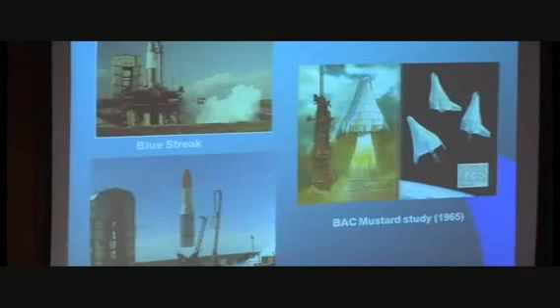Blue Streak, we developed a respectable weapons system. There are people who are advocates that we were sort of robbed when we lost Blue Streak. I'm not one of those advocates.

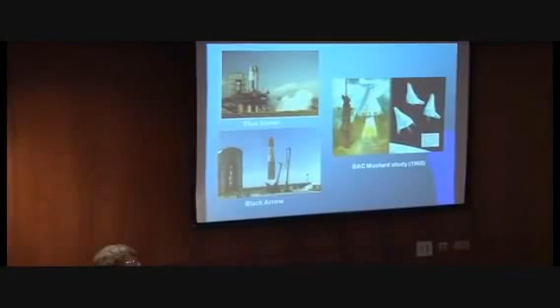If you go to East Fortune, just down the road here, go on a day when they'll let you into the little hangar at the back where they've got, I think it's the F-16 round of Blue Streak, and alongside Blue Streak is a Polaris A3 missile, and you will see there is no comparison as a weapons system.

And so what we did, we offered this to the Europeans, we built a multi-stage rocket out of it, and then of course we pulled out the first stage, which left the Europeans sort of a little bit lost for what to do next.

Just a few hundred miles down the road at British Aircraft Corporation, in the 1960s, people there were already looking at trying to get reusability into launches. A very successful study this was, but sadly, again, it never saw the light of day.

In the mid-1980s, we started on the HOTOL project, which came from the fact that in the early 1980s I'd managed to adapt some thermodynamic principles from nuclear engines I'd been working on, and found they could be applied to air-breathing engines. I'll talk about that in more detail later. The main thing is this study got underway, and it had its problems, which I'll mention.

But the biggest problem of all was this guy, and if the Conservatives win the election, I'm afraid he, like Dracula, may be back to haunt us.

Launchers then today, things have moved on a bit from those days of Black Arrow and Blue Streak. In Europe, after we pulled out our first stage, the Europeans went on and developed rather outstanding technology ultimately. Ariane 4, which came before it, was a bit basic, but Ariane 5 is a very sophisticated modern launch vehicle.

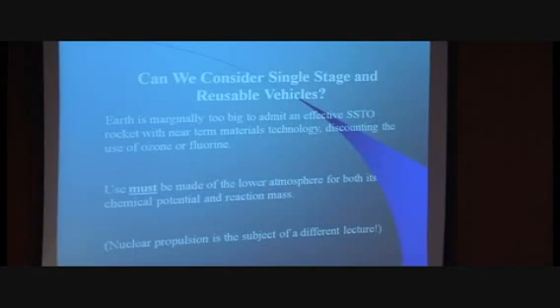However, consider if we'd lived on a planet twice the size. If there are people out in the universe living on planets twice the size of the Earth, maybe they're not here because they can't get off the damn place that they were born in.

So, with near-term materials and technology, and discounting the use of ozone and fluorine, it becomes obvious that we've got to make use of the atmosphere. Without going nuclear - and that's the subject of a different lecture - we must use the atmosphere both as a reaction mass and also for its chemical energy.

I'm told I can get a little more technical with this audience than I'm usually used to, so I assume everyone here is familiar with the rocket equation normally attributed to Tsiolkovsky, but which was actually being set as standard exams at Cambridge for university graduates during the mid-19th century. The object here is, if we want to get into orbit, we've got to build a system that can put about 9.5 kilometers per second delta V into the vehicle.

And so here we are. If we're going to do that, then the vehicle has to have, give or take, a mass ratio of about 8. That is, at liftoff, it weighs 8 times as much as it weighs when it's burnt all of its propellant getting to orbit. And that's quite a tall order.

Now, one option is to go air breathing all the way. You build a scramjet or something like that, and you put a lot of effort into the air breathing side of it. But we can consider this a little bit more logically.

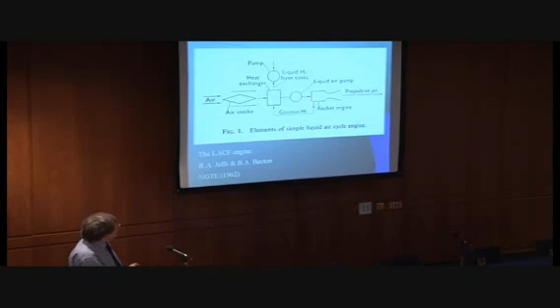At the National Gas Turbine Establishment, now long subsumed into other establishments I'm afraid, Jeffs and Barton in 1962 came up with the concept of the liquid air cycle engine, in which air passes into an intake and a heat exchanger. The liquid hydrogen fuel is simply pumped through this in sufficient quantities to liquefy the air, and then in this rather simple little diagram, pumping the liquid air into a rocket combustion chamber for the early part of the air-breathing ascent.

And the advantage of that, of course, is that when you finish with the air-breathing bit at some unspecified Mach number, you can then go on to replace the liquid air with liquid oxygen that you're carrying on the vehicle. So this concept goes back a very long way.

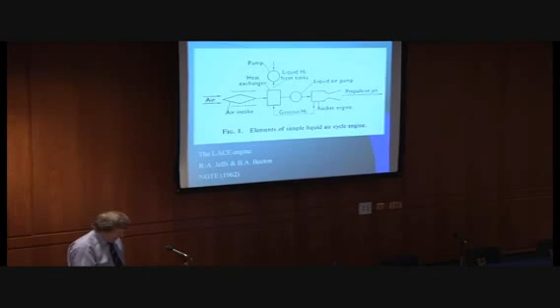There are huge problems in simply what's put there, but here you can see that the liquefaction is a simple-minded process of simply putting cold liquid in, cold air comes out, and hot gaseous hydrogen is the product.

Well, it turns out that if you sort of get to grips with the thermodynamics and invoke entropy as well as conservation of energy, then there are some interesting tricks that you can play. And for those of you who are familiar with entropy, you'll know that there's a perfect gas relationship for the change of entropy of a fluid, which relates not only the temperature ratio, but the pressure ratio that the fluid goes through.

And therefore, if you set the delta entropy to 0, you can trade a temperature ratio for a pressure ratio. And so if instead of using the hydrogen simply as a coolant, you use it as the heat rejection system for a thermodynamic cycle, lots of things are possible. And so having given you that tempter, I shall come back to that in a little while.

As Jason referred to, the immediate product of the work that I did on this in the 1980s was the HOTOL vehicle. And you can see that we had what was essentially a rocket, and we put some wings on it. And you can see that being rocket engineers, we put all the engines on the back of the vehicle, and we had the liquid

hydrogen tank in this long forebody. That was a fundamental mistake.

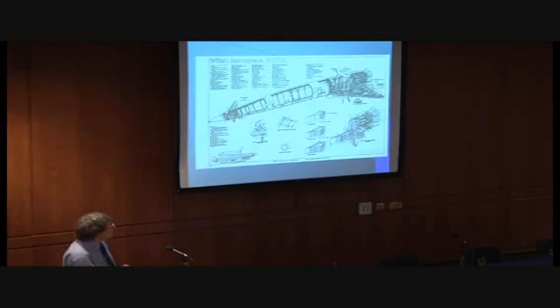Nonetheless, it was an inspired study, and this still remains the only study in the open literature where you can actually go and find everything that was done. British Aerospace and Rolls-Royce really gave this a very thorough going over. And at the end of it, the conclusion was that we'd got some serious problems, but nonetheless the concept was fundamentally sound. The serious problem was that by putting the engines on the rear of the fuselage, we had determined absolutely where the centre of gravity was going to be.

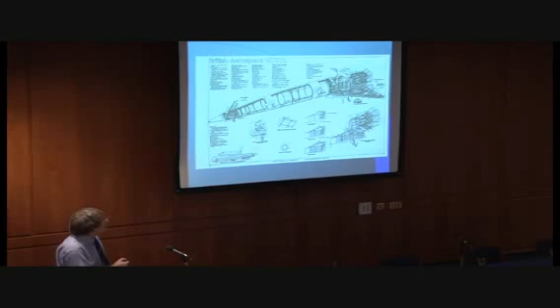The problem with this configuration is that as you accelerate up the Mach number range, the lift on the forebody remains more or less constant, but the lift on the wings falls off as 1 over the root of M squared minus 1. So you have a tremendous forward move of the effective centre of pressure of the configuration. At Mach 5 we were trying to battle with a 2,000 ton-metre moment trying to pitch the nose of the vehicle up. That result required huge flaperons, and an equally huge power supply to drive them. This vehicle became a transport system for hydraulics into low Earth orbit.

So, after a lot of thinking, Reaction Engines sort of came into being at the end of the 1980s, and we tried to understand what had gone wrong. The answer was: don't put the engines on the back of the fuselage. And because it turned into a rather long pointy sort of shape, I'm sorry to say that I remember the Skylon sculpture at the Festival of Britain in 1951, so we named it Skylon after this very inspirational British exhibition.

Unfortunately, Jason told me tonight that he gained his inspiration from a project I worked on when he was 11, so we won't dwell on that further in this talk.

What do we want out of a space plane if it's going to have commercial characteristics? We want it to be reusable, single stage - we don't want to be sort of getting an Airfix kit at the launch site every time we do a mission and have to put it all together.

We'd like it to be unpiloted. A lot of people don't really like that, but a pilot hurts you in several ways. First of all, you have to keep him alive, so we've got to put a life support system on, which is a waste of payload. It means that in the development program you are constrained again by having to keep the pilot alive, so most of the systems you put onto the program have got to be developed like a civil airliner, or at least a military aircraft, rather than a missile program.

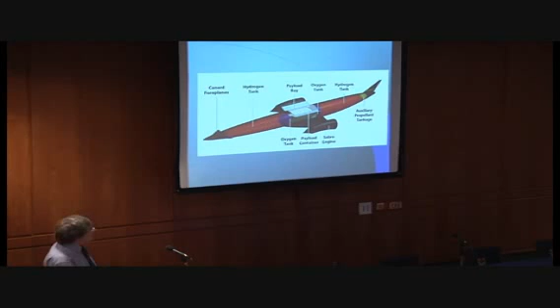You've got liquid hydrogen and liquid oxygen. During the air-breathing ascent, you burn the hydrogen from the rear tank, because this still suffers from the same problem that HOTOL had, but now it's much smaller - only about a 200 ton-metre moment. By burning the hydrogen out of the rear tank, the centre of gravity tracks forward as well, and therefore you can nicely cancel out. There is a residual problem, but you can trim that out with the canard foreplanes.

I don't want to dwell too long on this because I want to talk about the engines predominantly. With a liquid hydrogen vehicle, the good old faithful stressed skin structures that have stood us in good stead since the 1920s on aircraft design are no longer applicable. A lot of people have looked at hydrogen-fuelled aircraft and concluded they don't really work, and that's because they're stuck with the idea of the stressed skin structure, brilliant innovation though it was.

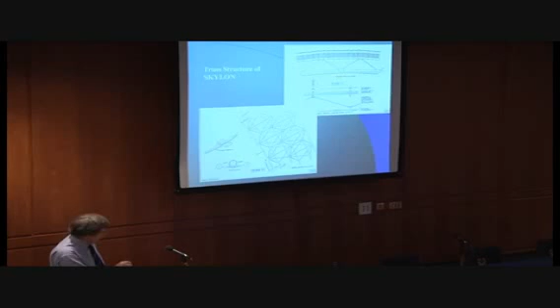But there was an earlier technology, which was airships. Liquid hydrogen really has the same problem as airships - it's a very low aerial loading of the vehicle. It turns out you need to build a Warren Girder structure for the aircraft, and put an aeroshell over the outside made out of a fibre-reinforced glass material. If we look at a temperature-specific strength chart, we've got silicon carbide reinforced titanium, and at the high temperature end, carbon-carbon and silicon carbide.

And there is this material, which is a fibre-reinforced glass. The original material was silicon carbide fibres in Pyrex - immediately a success, because the Pyrex sticks to the silicon carbide and gives a very good material. There are now other glass ceramic matrix materials, and in this region here is a very nice material we developed in this country, with good temperature characteristics and good specific strength characteristics. We're currently working with a French firm called Pyromeral, testing some of their material for monatomic chemistry compatibility in a glow discharge system we built at Reaction Engines.

And so, an airship-like structure with a glass ceramic aeroshell.

One advantage of having the hydrogen tanks on board is that Skylon re-enters about 10 kilometres higher than the space shuttle, so it doesn't reach such high temperatures. It has a larger heat soak, which is one of the problems of things with low ballistic coefficients taking a long time to re-enter. But by carrying 200 kilograms of liquid hydrogen for the return journey and vaporizing it in the tankage underneath the aeroshell, we can cope with the heat load problem.

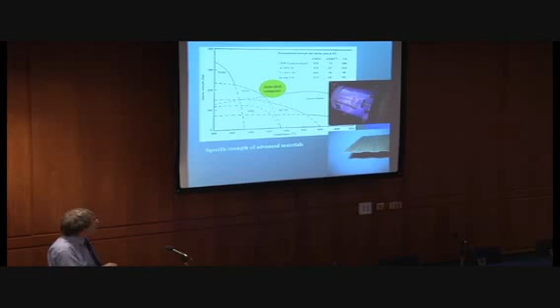Skylon is quite a mature project. QinetiQ some years ago did tests at Mach 9 and Mach 12 in the gun tunnel and in the flow visualization tunnel at Farnborough, and you can see the flow structure. The gun tunnel tests did show up some shock interaction heating and shock boundary layer interaction heating problems. We anticipated the shock ones, but we'd missed the shock boundary layer problem. But again, I don't want to dwell on that.

So Skylon configuration C1, which is the one I've mainly been talking about: 12 tons to low Earth orbit, 10 tons to the International Space Station, a 200 cubic metre payload bay, 4.6 metre diameter payload, and about 275 tons at the start of roll at takeoff. So a quite reasonable sort of machine.

It is 82 metres long, so the fuselage is about the size of a 777 fuselage, and that's because of the liquid hydrogen. Even though we've only got about 70 tons of liquid hydrogen on board, with something that's got only 7% of the density of water, it's obviously a real disadvantage.

We are currently revising this to the D1 standard with a 15-ton payload, because this design is now rather ancient.

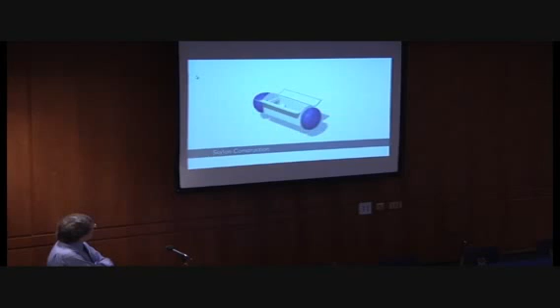This gives you some idea of the structural elements of the vehicle: the payload bay, liquid oxygen tanks, the hydrogen tanks, the glass ceramic aeroshell, the engines in the cells on the wingtips, and an undercarriage.

HOTOL could never take off on its own undercarriage, but Skylon is able to do that. In order to accept the energy of a rejected takeoff, we are proposing to use water-cooled brakes. On a successful takeoff, you throw away the 1.5 tons of water that it takes to cool the brakes if you need to reject it. Otherwise, Skylon would be a transportation system for brakes into low Earth orbit.

The idea is to try to make the loading of the payload extremely simple. I don't know what the current cost is, but 15 years or so ago, it used to cost $5 million just to put the payload into the shuttle payload bay. We're trying to look at the concepts of containerized payloads, so that your spacecraft arrives factory fresh to go with the Skylon into orbit.

In terms of fueling it, the tractor tows the vehicle out onto the start of the apron, and then liquid hydrogen, liquid oxygen, liquid helium, which is needed for pressurization and engine operation as you will see in a moment, are transferred into the vehicle. And then the tractor pulls the vehicle to the start of the runway.

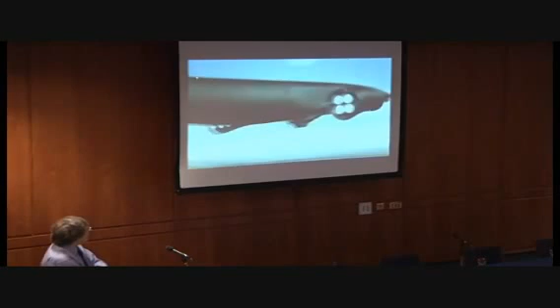Obviously you've got to close the intakes when you do the transition to rocket, because eventually you're going to re-enter the atmosphere, and you don't want the high enthalpy flow into the intakes during re-entry. These engines also have a bypass system, which I'll briefly mention later. We have to close the bypass system off as well.

On orbit, there's an orbital maneuvering system. You can see the OMS engines putting in the final velocity, and 38 reaction control thrusters for attitude control on orbit. There's also an auxiliary propellant supply in the vehicle mounted in the tail that provides a sort of gas main around the vehicle, supplying gaseous hydrogen and gaseous oxygen for fuel cells, auxiliary power supplies, and the thrusters.

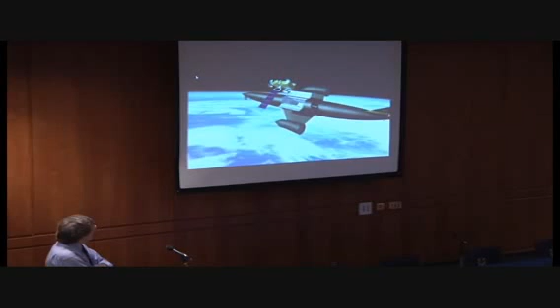The vehicle can carry a range of payloads, including a manned passenger module, depicted in this slide. As I'll mention at the end of the talk, we think this is the first part of an entire space infrastructure. If you're going to build equipment in orbit, you need an on-orbit assembly facility, which is what's depicted here.

During re-entry, the vehicle enters the atmosphere at a very high angle of attack, initially about 70 degrees, in order to lose as much velocity as possible in the first instance. But then during re-entry it undergoes a gradual pitch down to about 11 degrees, which gives us its maximum lift-to-drag ratio at round about Mach 11.

At round about Mach 9, we get authority from the tail fin. Prior to that, we have to use, same as the Space Shuttle does, the lateral yaw thrusters in order to control yaw, but we can control the pitch during re-entry on the foreplanes. We have to carry water as a coolant for the foreplanes for that part of it. And then finally, the vehicle comes in for a dead stick landing, just like the shuttle.

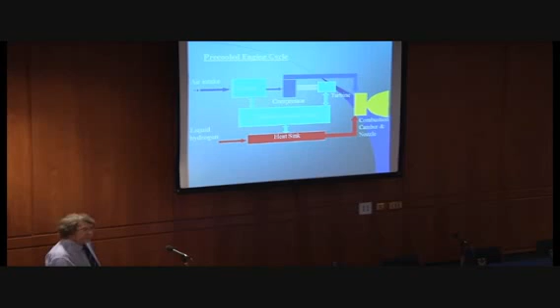I mentioned that what we actually want to do to reduce the amount of hydrogen required to cool the air is be a bit cleverer than just pumping it through the airflow to cool it. So we'd like to use the hydrogen as a heat sink for a thermodynamic cycle. Here's the hot air, the heat exchanger, which transfers heat through the cycle, which we can then drive the turbine with. So rather cunningly, some of the heat never actually leaves the air - it gets immediately put back into it through the compression process. Therefore, we don't have to remove all of the heat from the air with the hydrogen.

The only part that gets removed is by the heat sink function, which eventually finishes back in the combustion chamber anyway. So this is the first sort of chapter, or second chapter normally, of your thermodynamic textbook on heat engines - that what we're doing is actually getting some work out of the heat transfer process.

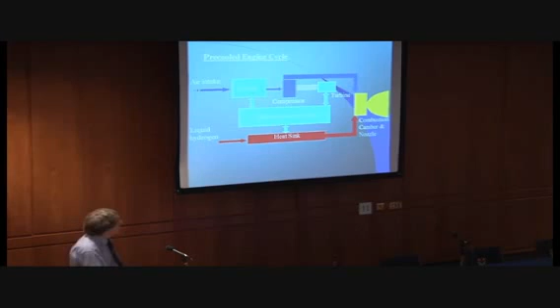It gets a bit more complicated when you try to start putting some of the equipment in, so this is sort of a semi-real schematic. Here's the pre-cooler, and what we've done is introduce a helium loop into the engine. On HOTOL, we did all this with a hydrogen loop, but everybody was very worried about what happens if a pigeon goes in and breaks the pre-cooler and all the hydrogen then goes through the engine. That's something that could be debated, but anyway, we chose to use helium. The main reason being that the Inconel materials that we'd like to use in the pre-cooler don't like hydrogen. With helium, you can use some of the better nickel alloys, and we in fact use Inconel 718.

So a helium circulator takes cold helium, cools this, and then passes it through another heat exchanger, which is heated by a pre-burner, so that helium is always at 1180 Kelvin at this point here. That then goes to drive the turbine, which is driving the compressor, before rejecting heat to the liquid hydrogen flow, and the whole of the hydrogen flow goes to the pre-burner. The airflow bifurcates - part of it goes to the pre-burner, a variable amount depending on what Mach number you're at, and the rest of it meets up with the rest of the hydrogen in the combustion chamber. Now the advantage of this is that you can vary the temperature of the pre-burner so that this temperature here in the helium loop is always constant at 1180 K.

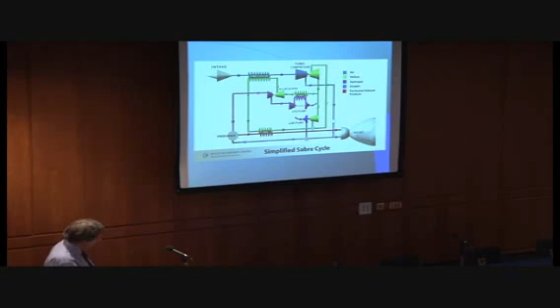So with the exception of this bit of the engine, the rest of this engine doesn't know what Mach number it's flying at. It's a drag racer engine, it's not a Formula One cruise engine. And what we need if we're going to have a successful air-breathing accelerator is an engine which is Mach number insensitive. Until we reach the temperature limits in the pre-cooler, that's exactly what this engine is.

Once you start to put it together in reality, it starts to get a bit more complicated. You can see that the pre-cooler is quite a dominant part of the engine, the turbocompressor, the rocket engines, and then all the thermodynamic gadgetry is in here.

It's an annoyance that the captured airflow in a supersonic intake does not match the airflow of the engine, and the captured flow goes roughly as 1 over the Mach number. So at low Mach numbers, very much more air is entering the intake than you need, so you bypass that air around the engine. Even with these clever thermodynamic tricks, the engine still takes far more hydrogen than you need for combustion in the main chambers, so that extra hydrogen is added to the burners in the bypass duct.

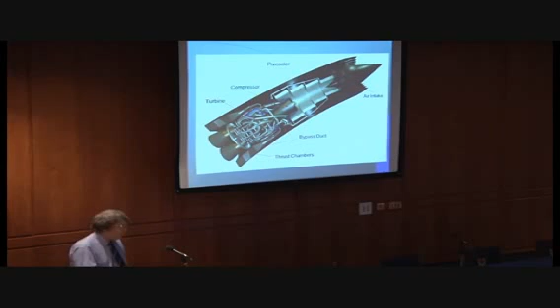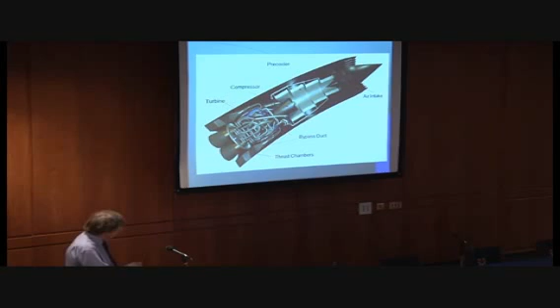And at this point, there's usually somebody who says, so what this really is, is a turbo ramjet. But it's not, because in a turbo ramjet, you use the gas turbine to accelerate you up to some Mach number, then you turn the ramjets on, and it's the ramjets that continue to the higher Mach numbers. This is exactly the opposite. At Mach 5, there is virtually no flow down this at all, and all of the thrust is developed by the main engines. The maximum thrust from the bypass duct in this case comes at round about Mach 3 to 3.5, where it gives a very useful contribution.

So some parameters then.

The nozzle area ratio is of the order of 100, a bit more than current designs. In the air breathing mode, the combustion pressure is about 115 bar. If you think about a gas turbine, that's round about 30 bar. So that's a very sporty compressor, but nonetheless, a 140 bar delivery compressor is quite doable. The rocket combustion pressure is state-of-the-art, 145 bar.

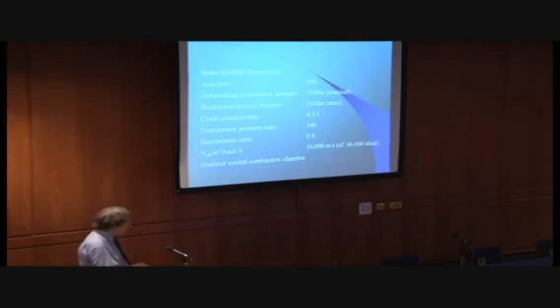What other things are of equivalence ratio? During air breathing, the equivalence ratio of the engine - the number of times the hydrogen we need above stoichiometric - is about 2.8, whereas the old LACE engine was around 4. So we've made a substantial improvement there. As a consequence, we get a theoretical effective exhaust velocity of about 16 kilometers per second, compared with a theoretical of about 46 kilometers per second. We are currently looking at new designs of Sabre engines, Sabre 4, which approaches that sort of number, but I shan't be saying anything about that tonight.

Pre-cooler construction then. We've shown that with a pre-cooler we can actually do this job and do it rather well. But how do we make it? Well, the designs we currently work on involve huge numbers of extremely small tubes. The tubes we're dealing with are less than 1 millimeter in diameter, made out of Inconel 718. And they are modular in that we have a header, a sort of Swiss roll of tube sheet to an inside header.

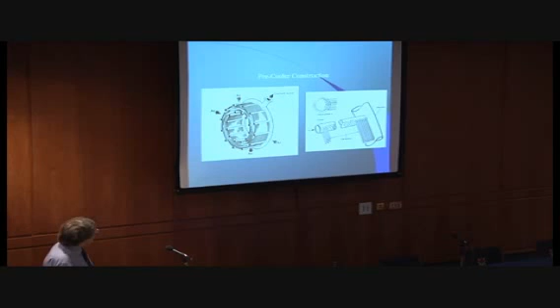The air flows radially in through the heat exchanger, and the cold helium flows in through the header, out along this spiral track to the outside, and then out here. So this heat exchanger has got the air in crossflow, but the overall effect is pure counterflow almost. And these heat exchangers have got extremely high effectiveness, 92 to 95% effectiveness.

Here's some that we did earlier. This was one of our first ones. What I want to emphasize here, you're looking at a tube here - it's 0.88 millimeter bore with a 30 micron wall. And our current tubes are of that sort of order.

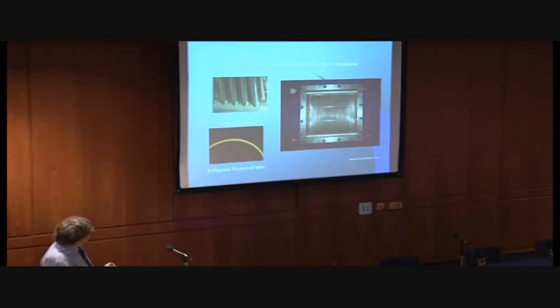This is an earlier research heat exchanger that we built, and a lot of our effort goes into, after all of this clever stuff, the nitty-gritty of how you braze these tubes into the headers. And that is quite a major task.

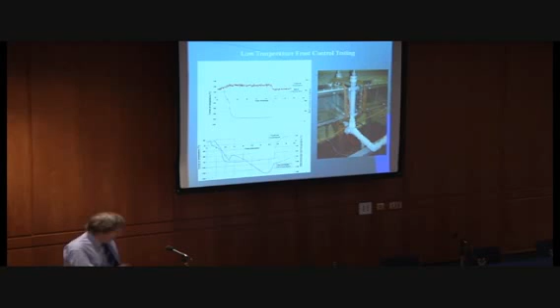When the air enters the engine, it's about 1,000 degrees centigrade. By the time it's been through the pre-cooler, it's about minus 140. And of course, there's a lot of water vapor, even in the air in this room at the moment. If you just try to do that trick, within about 3 to 5 seconds the whole thing is frozen absolutely solid.

So a lot of our activity in this research tunnel was to find a way of preventing frost formation. What you can see here is the pressure drop through the matrix over a period of about 11 minutes in that particular test. And you can see that we solved that problem. But the bad news is I'm not going to tell you how we did it.

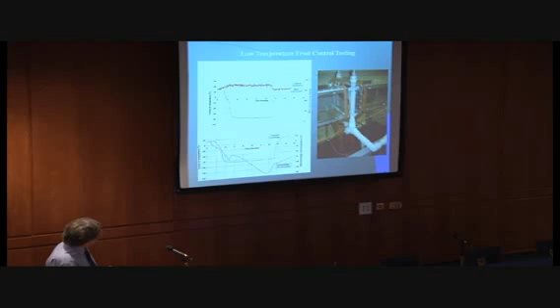So you can see here the temperature on the air side is down at sort of minus 80. During the course of the test, the coolant side temperature follows a program so that we can get as much information as possible, starting at sort of minus 50 down to about minus 150. So we did solve the frost formation problem.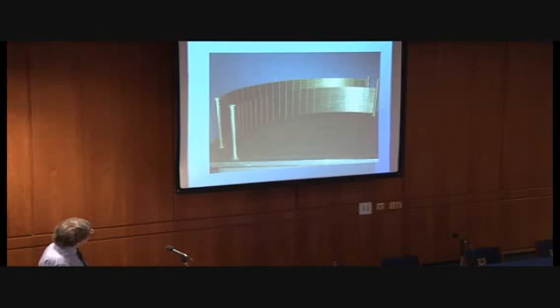But the important thing for the moment is the pre-cooler technology, and you can see that we're doing pretty good at brazed joints these days. We're very, very close now to getting 100% brazed joint success. If we don't get 100%, we simply plug the few percent of tubes that leak.

Now, heat transfer in these engines is extremely important.

And it turns out that the whole thing is dominated by the heat transfer coefficient on the air side of the pre-cooler. If we could improve that, quite major miracles are possible with this type of engine. We currently have a student from University of Bristol doing her PhD working on heat transfer enhancement on the tubes in a matrix like this.

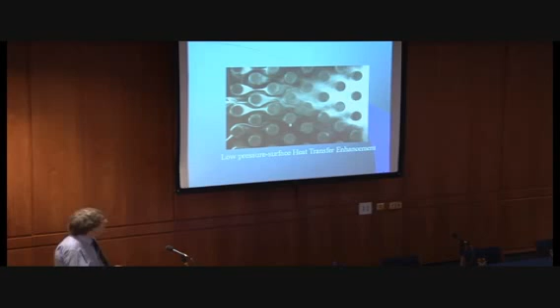This is a flow visualization. We operate these heat exchangers pretty much in the laminar regime, laminar to transitional. So what she is looking at is whether we can modify the surface of the tube without putting up the weight too much or the pressure drop. To give you an idea of the problem, the wall thickness of the tubes when we finish with them is about 15 microns. They're much thicker than that when we get them from the manufacturer.

We then process them down to about 15 microns for a real engine. We've moved on now. We've solved virtually all of the problems, and one of the things I want to say is that we are no longer into research on these engines. We are into development, but there are no issues left in this project where we need to, for example, go and talk to DARPA, which is a sort of frequent suggestion.

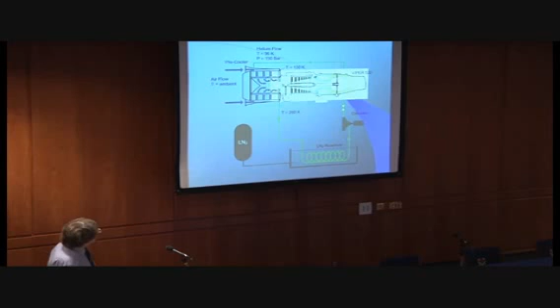We don't have any research issues left, but what we are in the process of doing is using a Viper jet engine with a pre-cooler mounted in front of it, using liquid nitrogen as the heat rejection system and a 200 bar helium loop in order to demonstrate that we can actually build these pre-coolers and operate them. We've had this facility ready at Culham now for quite a few years, and thanks to ESA grants and private finance totaling about £6 million, we're now in the process of getting to the point where we're going to be testing this in anger during the middle of next year.

We're currently building these pre-cooler modules. We've set up our own production plant in Abingdon, and we've also acquired 2 other manufacturing companies which are part of Reaction Engines to build all of this equipment. So Reaction Engines has moved on from 3 people in their lounge with some faxes to quite a sizable company with a lot of facilities to do this.

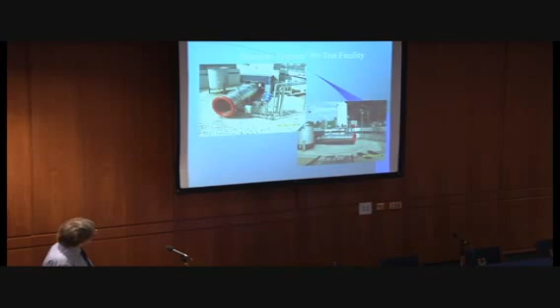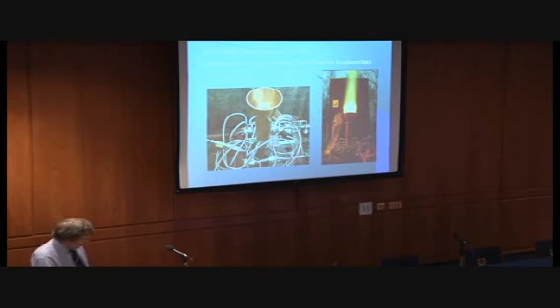You can just see the film there in this engine which we built and tested a couple of years ago now. It's very short, of course it's ablatively cooled, but let's see if I can go back and do that again in case. In particular you'll see that all the action is in this sort of few millimetre thick layer here at the edge. We injected salt water into that to make it visible. Normally you can't actually see that in operation.

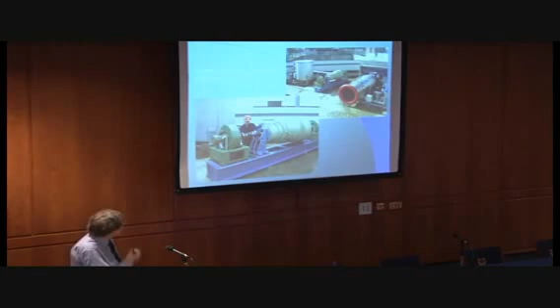The other aspect of these engines are the turbines, and this is an experimental turbine, which is a counter-rotating turbine with no stators in it. Now, I glibly showed you a cold air compressor driven by a helium turbine. Helium, low molecular weight, high temperature, the turbine wants to run fast. The air is cold, high molecular weight, and therefore wants to run slow.

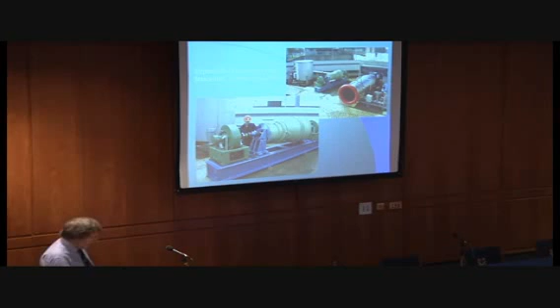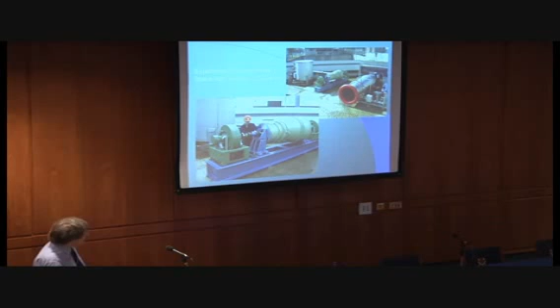The way to do this is to split the compressor into two spools, to throw the stators out of the turbine and have the turbine stages contra-rotating, each stage rotating relative to the opposite direction of the one after it. This way you can fool the turbine into thinking it's running twice as fast as it really is. As a consequence, the turbine efficiencies can be very good - 94% we achieved in this experimental turbine. The blading for this was designed by the von Karman Institute in Belgium. There you can see rotors 1 and 3 and rotors 2 and 4 with the inlet plenum.

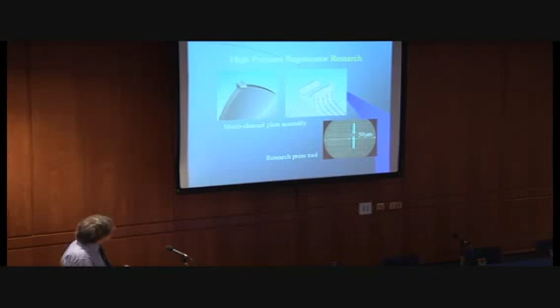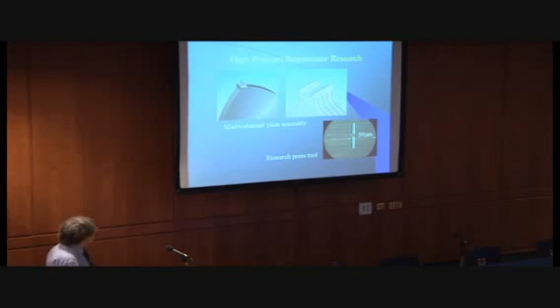There are other heat exchangers, and we've got ongoing research on that. To give you an idea, this is a CAD drawing, but we're looking at channels which literally you can't see. It's a bit like looking at a CD when you look at one of these things. We're looking at channels that are sort of 30 microns with about a 6 micron wall actually separating them. And those are a vexing manufacturing problem which I won't dwell on any longer.

We've also investigated silicon carbide manufacturing at TEMMAT. In this case it's reaction bonded silicon carbide, where they start with graphite and flood it with liquid silicon, which converts it to silicon carbide. One of the problems we get is little silicon spherules filling the channels, which we have to get out, but it looks as though this technology can be developed quite successfully. They did quite a simple bit of development work for us, and it looks as though that is with us.

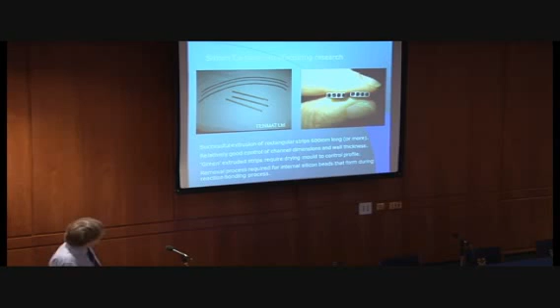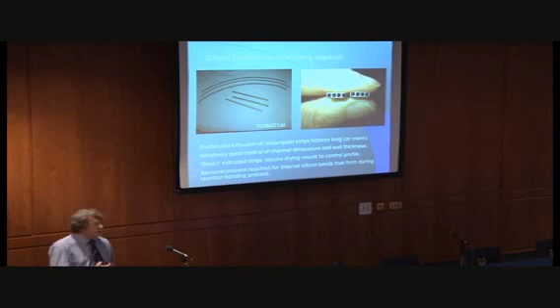At the present time, we're looking at heat exchangers with very good entropy conserving characteristics, delivering about 300 megawatts per ton of heat exchanger. That is more than adequate to get successful engines, and we are nowhere near the physical limits at that. What we are pushing at the moment are the manufacturing limits - the whole future of this is manufacturing the components.

Skylon then, just to reiterate: it's about a 9.5-year program, going to cost about £7 billion. Each vehicle off is going to cost about 190 million if we produce 30 vehicles, and we think we can build a vehicle that will survive about 200 flights before it goes to the crusher. That means an engine lifetime in each vehicle of about 50 hours, and that helps a lot - we're well out of creep issues and so on.

The recurring cost for a flight comes down to about £5 million a flight, so let's say $8 million. Currently on the Space Shuttle, a flight is about $700 million.

Now, what I haven't put in that figure is the insurance. The insurance is a vexed issue. Third-party insurance could quite easily come to $10 million a flight, and first-party insurance would be of the order of $5 million. So three-quarters of the flight costs with a vehicle like this, in the early stages of entry to service, would be insurance costs.

The thing that I want to point out is the launch price pays everything in this case. There's no subsidies, as there are with the Ariane vehicle and so on. Spaceports are commercial, and what we hope is that there will eventually be something like a dozen or so commercial operators competing with the payloads to go. The objective is to move the whole of access to space into the commercial arena.

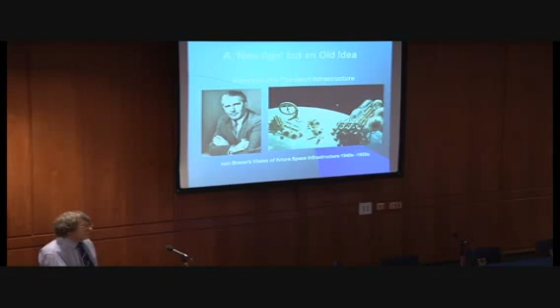So having said that, I just want to spend about 10 minutes briefly going through the consequences of that. It's not new - people have been looking for the last 60 or more years at having a space infrastructure. Now, I really wish that we could just dump all the bits in orbit and they'd stay there, as the early pioneers sort of envisaged.

The reality is that each of these components is in its own orbit around the Earth, and therefore all this lot jostles around every time it orbits the Earth. So you have to have a facility to actually do it in.

Some of the equipment we need for Skylon is an upper stage, because one mode of operation is to not go quite to orbit, but boot the payload out with its own propulsion stage and let it go to orbit and land the aircraft downrange, and then by one means or other get the aeroplane back.

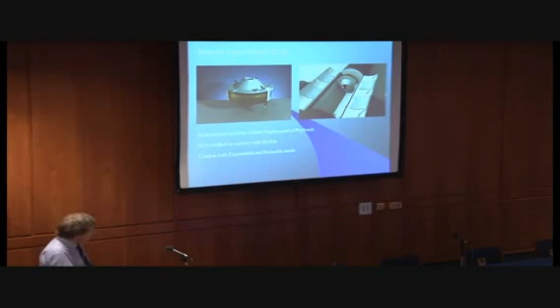It is possible on orbital missions to go into resonant orbits now. It's just a coincidence that at 300 kilometers, Skylon is resonant with the geostationary transfer orbit. So when Skylon does 7 orbits of the Earth, the upper stage does an orbit out to geostationary orbit altitude and back again, and it meets up with Skylon with a little bit of orbital manoeuvring, absolutely accurately, so the stage can be recaptured and returned.

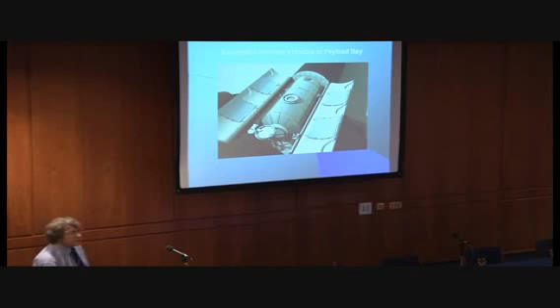I've already mentioned that we can put in a passenger module that can carry 20-odd passengers to an international space station. My colleague Mark Hempsell has put a lot of study into that, and we think that we could fly research laboratories on specialized missions.

We have looked at a stage which we call the Fluyt stage. I'm told that a fluyt is a Dutch barge of some description - I didn't think of the name, so don't blame me.

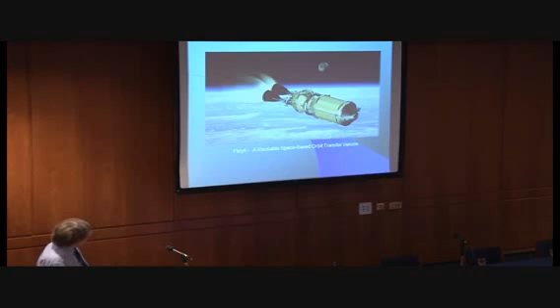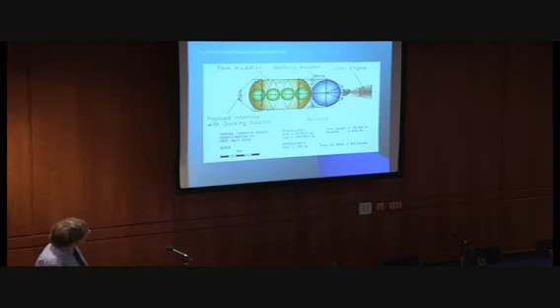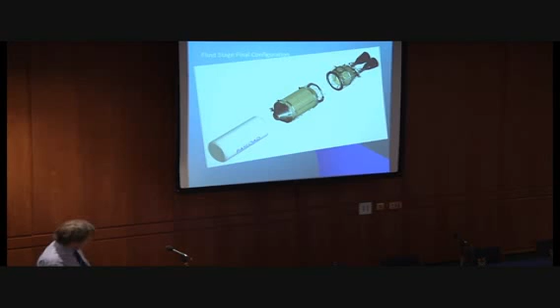The FLEYE stage is essentially using the Vinci engine, which is being developed in Europe at the present time - again liquid hydrogen, liquid oxygen, so it's common with the Skylon vehicle, with hydrogen to pressurize the stage. There you can see the hydrogen tank in the Skylon payload bay. It arrives on orbit in the propulsion module and LOX tank, the hydrogen tank, and of course payload being conveniently labeled payload, and that assembles into an orbit transfer vehicle configuration.

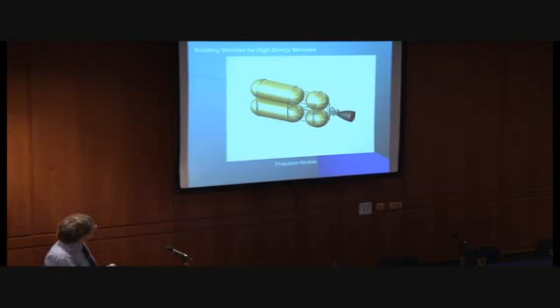To go beyond Earth orbit, one of the things we looked at, mainly to make sure we were getting Skylon right, was could we do a Mars mission? The answer is you use Skylon to ferry into orbit modules of various bits and pieces for assembly on orbit, then put together this whole stage essentially in an orbital base station, an orbital assembly facility to keep captive all of those bits, in the von Braun style.

Skylons would regularly ferry to that base station. A Skylon can be turned around in about 2 days. So a Skylon could ferry a payload to the station, land, go through its checks, be refilled, and 2 days later be back up there with another payload.

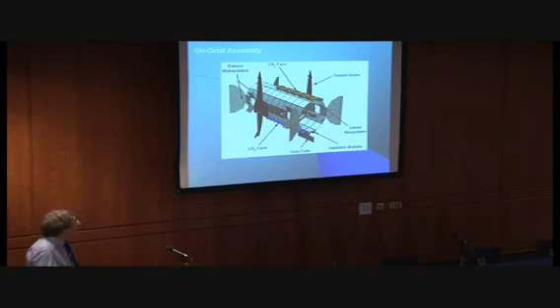522 payloads would get you 3 vehicles together, which could then give you a vehicle like this, which you could fly 3 of to do a Columbus-type mission to Mars. Here you can see a ferry vehicle using carbon monoxide and liquid oxygen as propellants. Conveniently, you can make those out of the Martian atmosphere using a nuclear electric plant. Therefore, we've looked at the possibility of expanding.

We've looked at a mission flown in 2028 because it's a quiet sun in 2028. But I personally think this is probably going to be middle of the century rather than the first quarter of the century.

Skylon will, I'm quite convinced, transform how we use space and how we access it.